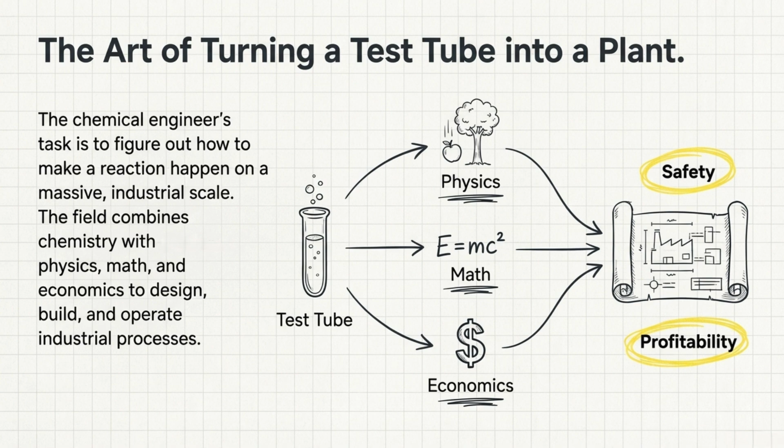To understand how engineers achieve this balance of safety and profit, we must look at the core principles, the main pillars of the field. The first pillar involves separation processes. When we look at nature, materials are rarely found in a pure state. We often find them mixed together with other elements. However, industry requires purity. Therefore, engineers use specific methods to separate these mixtures into pure, usable components. You may be familiar with techniques such as distillation or filtration. These are the primary tools engineers use to achieve that necessary purity.

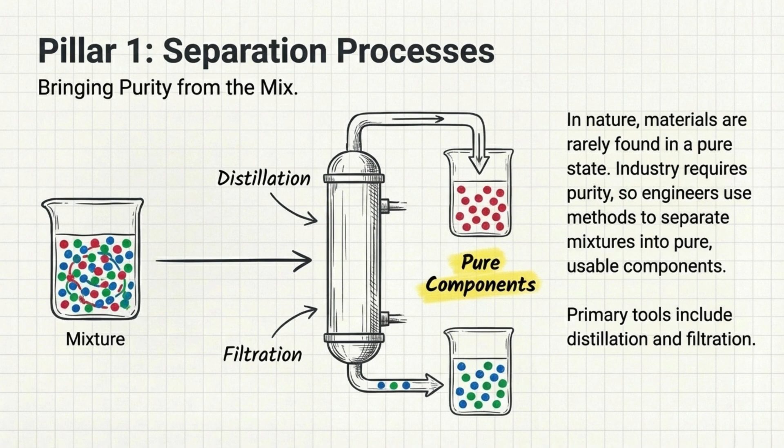The second pillar is reaction engineering. This principle moves beyond just the chemistry of the reaction and focuses on the equipment. It involves designing reactors. The engineer must meticulously calculate the correct size and shape of the vessel. This is crucial because they must ensure the chemicals interact correctly inside that vessel to create the desired product effectively.

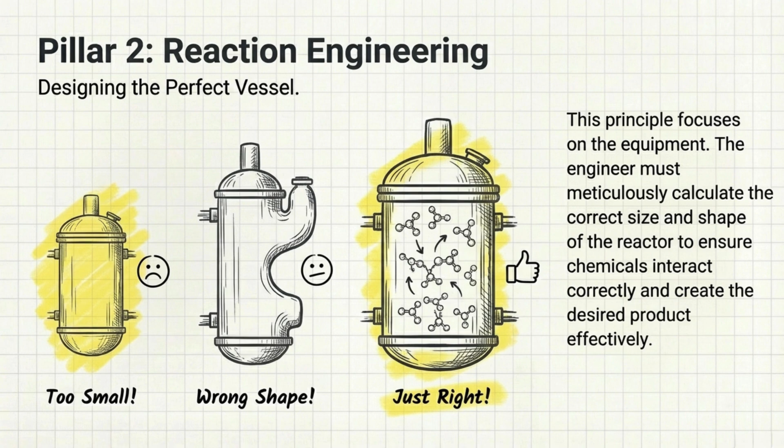The third pillar is process control. Once a plant is built, it must remain stable. This field focuses entirely on making sure the plant runs safely and efficiently over time. It is not enough to just build the plant, one must maintain it. Engineers use automated systems to monitor critical variables, specifically temperature, pressure, and flow rates, to prevent accidents and ensure consistency.

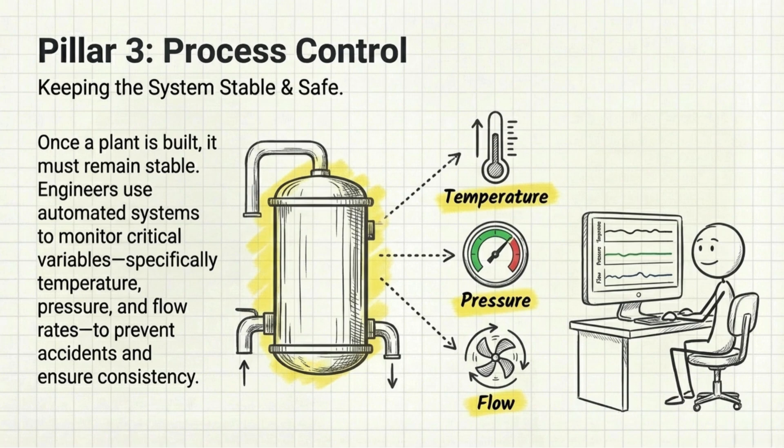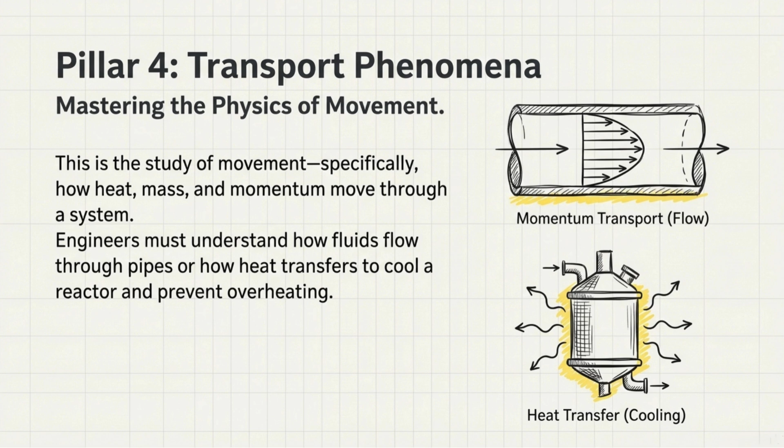The fourth and final pillar is transport phenomena. This represents the physics of the process. It is the study of movement. Specifically, it studies how heat, mass, and momentum move through the system. For example, an engineer needs to understand exactly how fluids flow through pipes or how heat transfers to cool down a reactor to keep it from overheating.

Now that we understand the theory, what is the practical output? You might not realize it, but chemical engineers are involved in making almost everything around you. Let's look at the energy and materials sector. Engineers turn crude oil into fuels like gasoline. But beyond fuel, they also create the plastics we use every day, from containers to packaging.

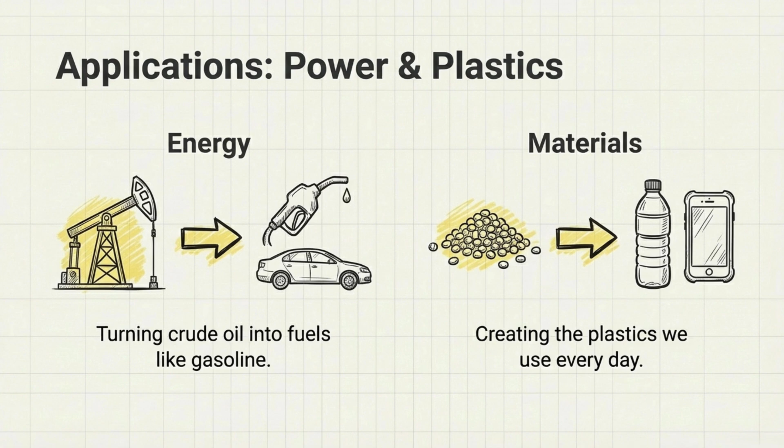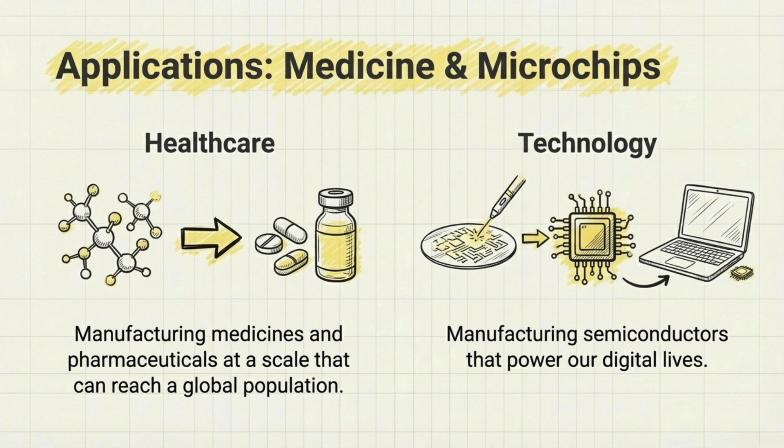In the healthcare sector, they are vital. They work in the life sciences to manufacture medicines and pharmaceuticals. Their work ensures that pills and vaccines are available for everyone who needs them, producing them at a scale that can reach a global population. They're even essential in the technology sector. Chemical engineers help manufacture the silicon wafers used for computer chips, also known as semiconductors, which power our digital lives.

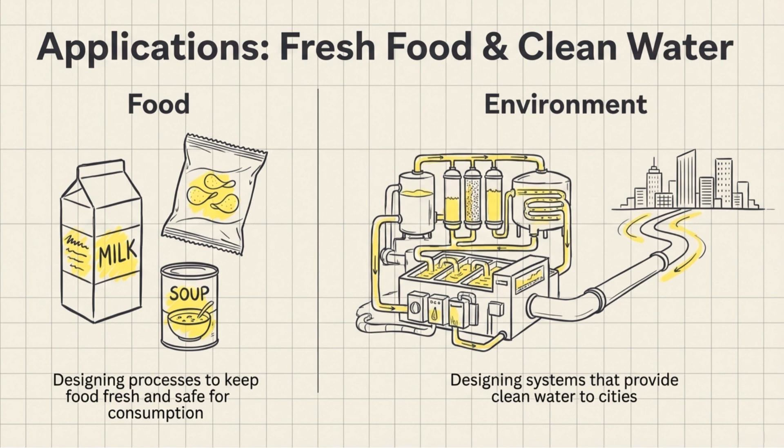Finally, we must ask, why does this field matter? Chemical engineering is not just about making products. It connects to big-picture issues that affect our future. It is the driving force behind sustainable energy solutions as we look for new ways to power our world. It also plays a critical role in environmental protection.

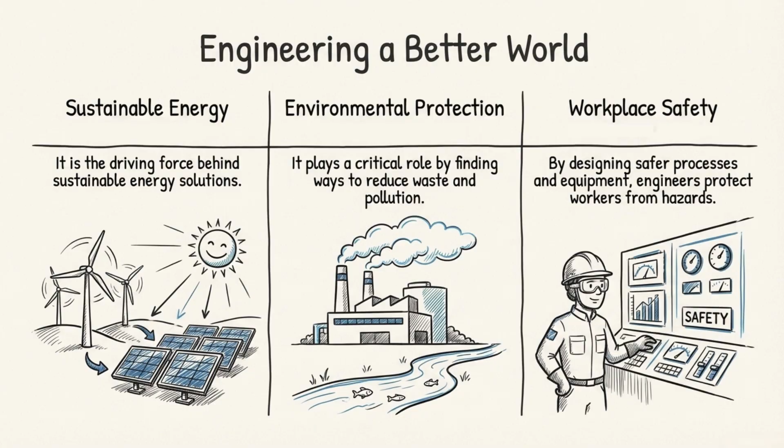Engineers are constantly finding ways to reduce waste and pollution, ensuring that industrial progress does not come at the cost of the planet. Additionally, the field focuses heavily on workplace safety. By designing safer processes and equipment, chemical engineers protect workers from hazards and accidents, ensuring that the people running the plants are safe. Ultimately, it is a field that uses science and math to make the world safer, cleaner, and more efficient.